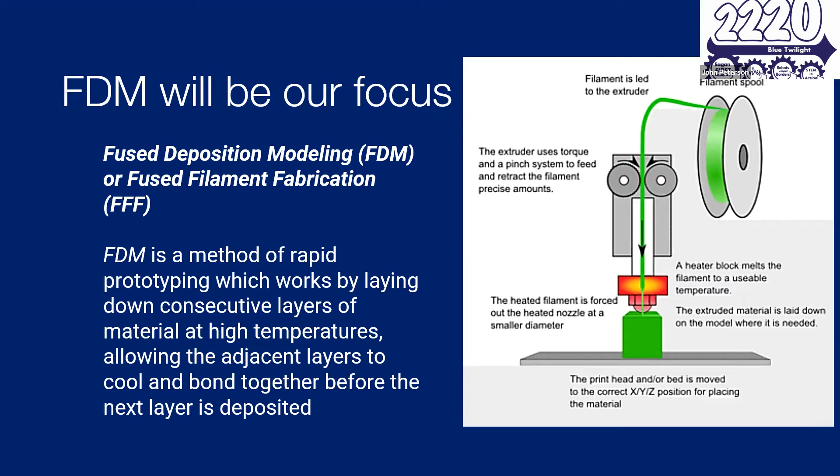But a lot of that comes from, I have a lot of experience and I know how to make and print these parts. And I'm hoping to impart that knowledge to you so you make a great robot with great 3D printed parts.

Let's take a review here with a close-up of FDM technology. If you look on the upper left, you can see an extrusion device. It's sort of like squeezing toothpaste out of a toothpaste tube, or a hot glue gun. In fact, that's how one of the guys who developed this process started working. He just layered up using a hot glue gun and made something that looked like this.

And one thing you'll notice about it is it's not solid. The way this works is all the material that gets deposited down has to remelt and adhere to the next layer, but there's still gaps in it. So one of the first things you'll learn is that there are limitations to FDM, and it means that sometimes the best choice is to either machine a metal part or buy an injection molded part. And as an example, we'll get into that later too.

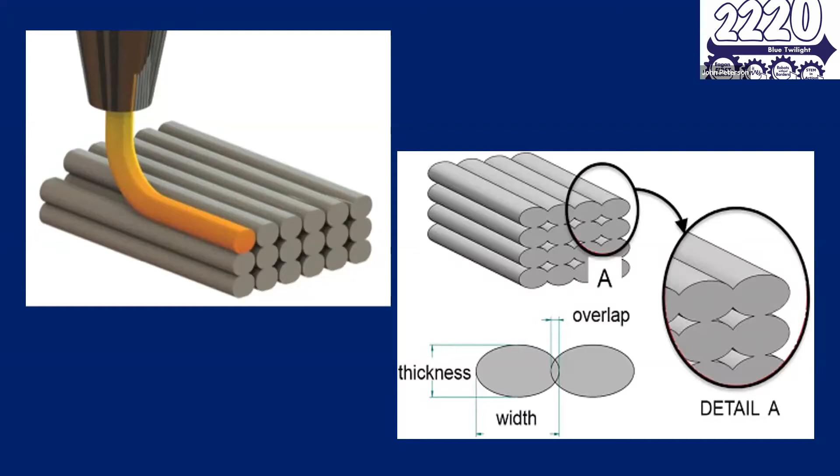But you can see how ideally when they join together, there's a little bit of overlap so that the machine with both this heat and pressure squeezes the layers together and holds them.

And that is something you can affect when you are slicing your part and laying it out on the build platform. And if any of you couldn't think of another material, a very common one is wood. If you think of a 2x4, if you try to break it in the long direction, it's very strong, but you can jam a crowbar in the middle and you could pry the fibers apart.

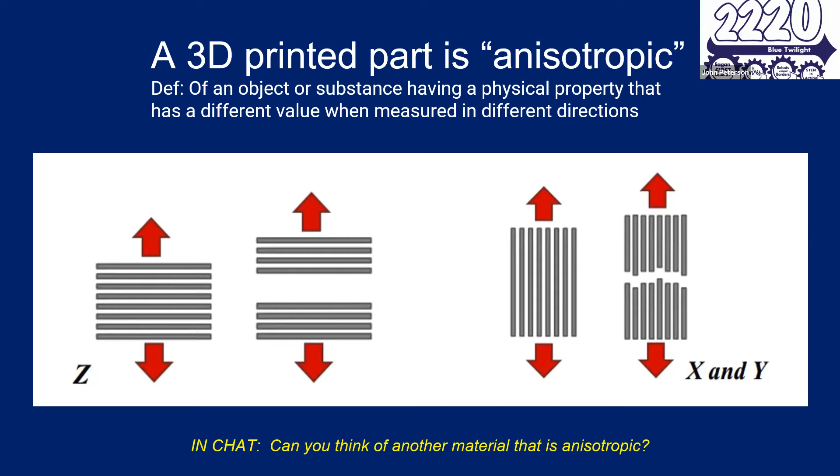So what you want to do is you always want to put a radius in there when you have a part like that, that has a force with a sharp inside corner. That smooths it out and makes it much stronger. And another thing that it does is whenever the machine has to come to a sharp corner, it has to slow down and actually stop. And what that does is it adds extra heat to that section of the 3D print and can cause it to warp later on.

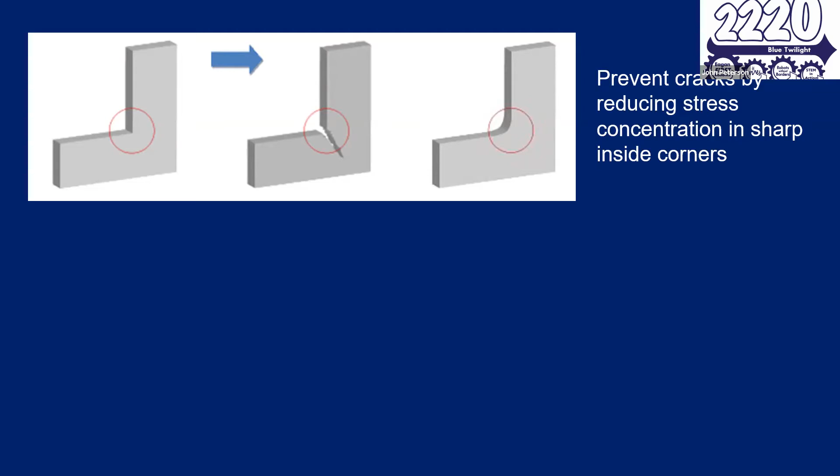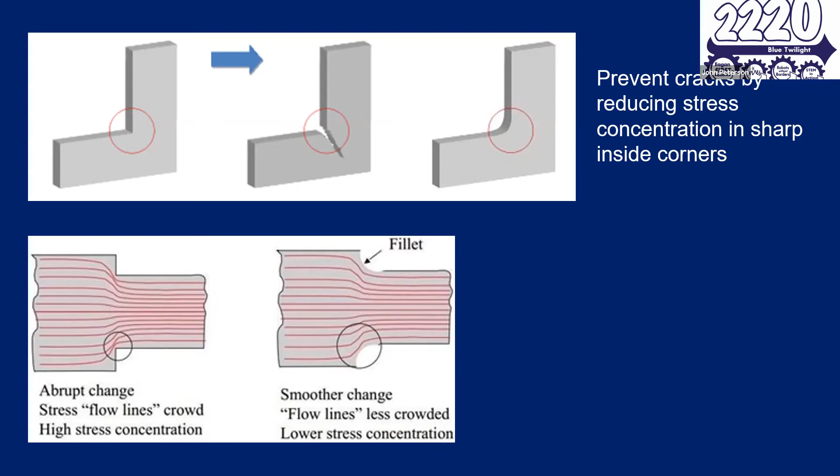And you can see the lines of force are, again, separated and have some space between them when the fillet is added to the part. And it's a very simple thing. You just use a radius command and you add it right in there.

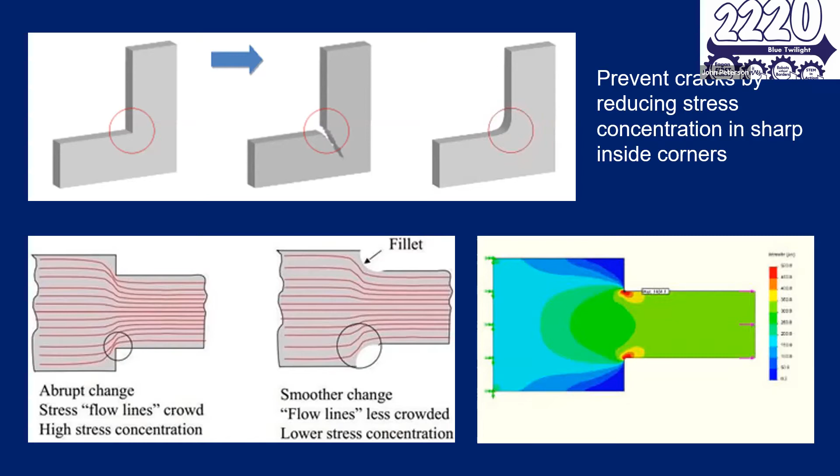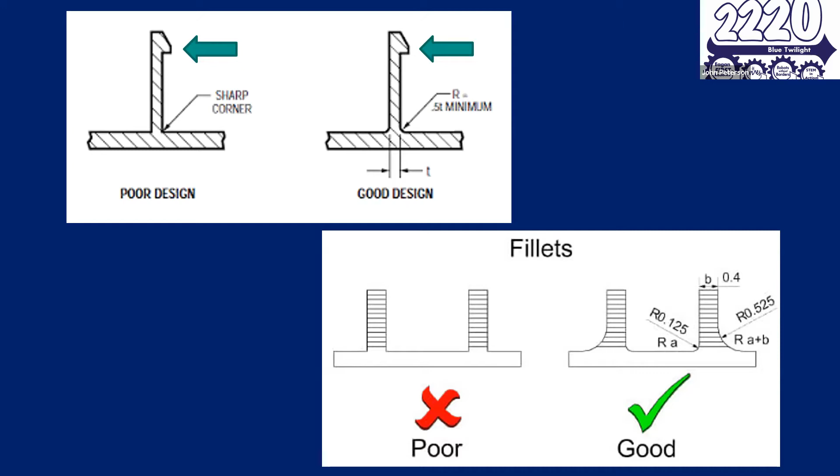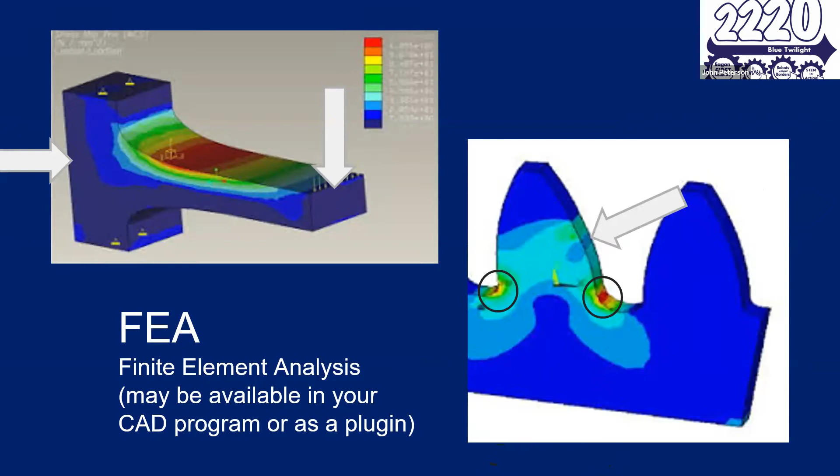Everybody's used to gears. Typically, the forces tend to be spread out, but in this particular part of the simulation, it's centered where the arrow is. And you can see where the high stress concentrations are. And so what you might do is, if you have the space, you've got to make sure that the mating teeth don't cut into that area, but you might put a little extra radius on there, and then it would be good to go. It's especially important for plastic parts.

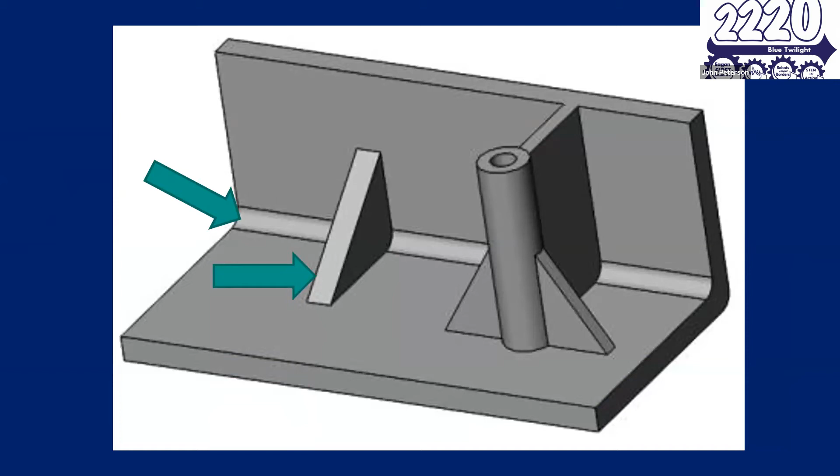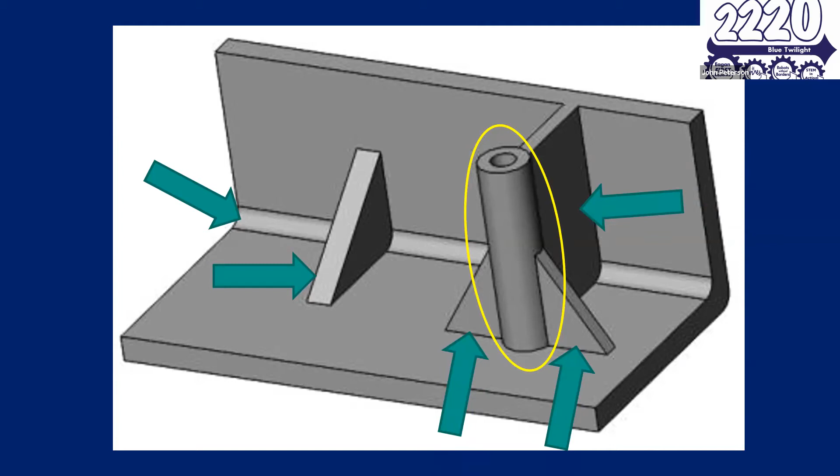And you've decided you want to add a boss in here, and it's hollow, so you can thread it, put screws in there wherever you want. But just standing there, it's not going to be very strong. So you can add brackets to each side, and you can also stabilize it with the other wall with this bracket right there. All things that are quick and easy to do in CAD, but they make a huge difference when you've printed your part and put it into whatever application you're using it for. Of course, it also helps to know when you're designing your part where the forces are going to be on this part, so you can reinforce them accordingly.

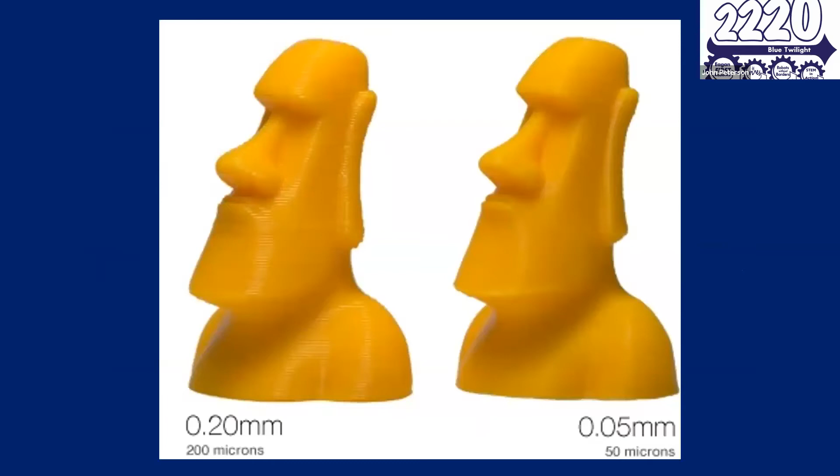All right, now let's look at some appearance related issues for nozzle and layer height size. You've probably seen a lot of these things with different machines. You can see on the left, they used a much bigger nozzle on the machine than they did on the right. The lines that they built it with are very visible. The ones on the left are probably more appropriate if you're making a functional part. The ones on the right are more appropriate if you are making an appearance related part, like this is.

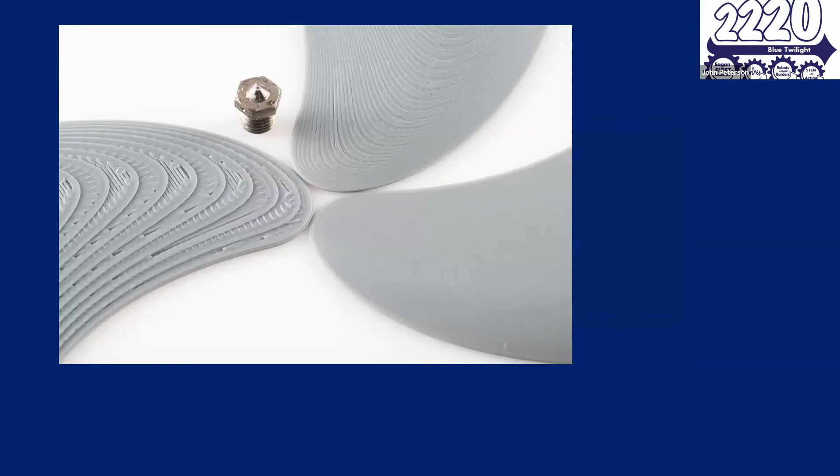Also, when you're printing things that are thin and the angle on them is very long, you can run into situations like this. You can see on the very left, it's very coarse, the stepping there and everything like that. And then it gets finer and finer as it goes around clockwise. What you're looking at here is the one on the left has some much thicker layers. And as you can see, they bulge out along the angle and are very visible. On the right, you can see that because the layers are finer, there's not much that you can see.

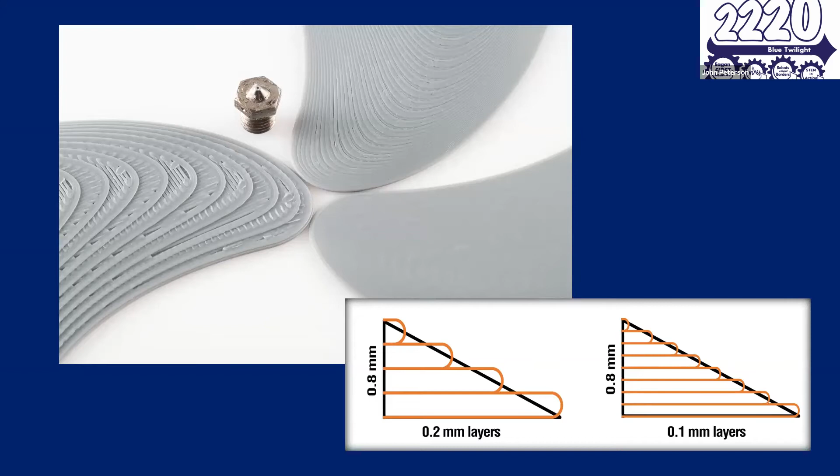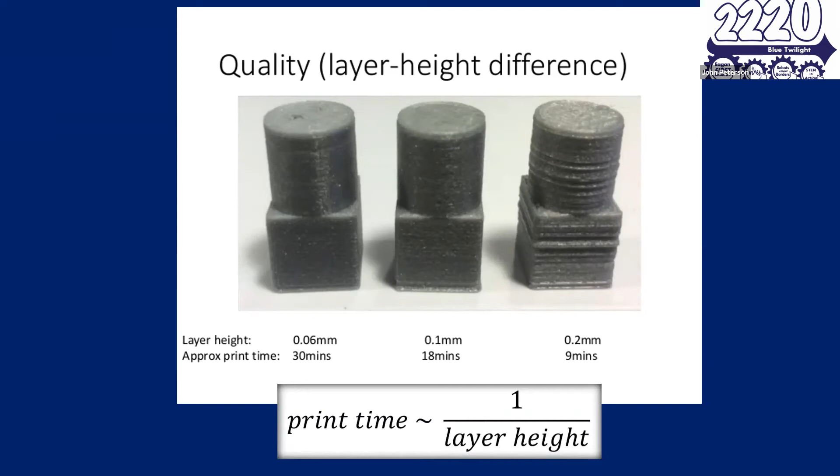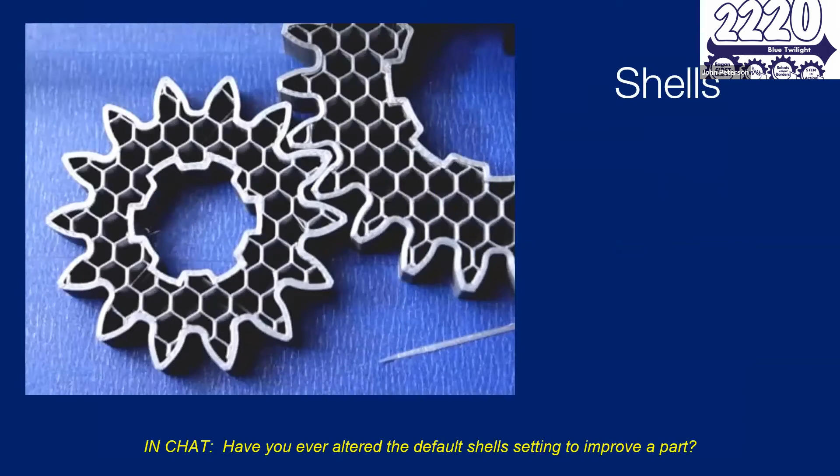There are other choices besides nozzle size and layer height that affect time, failure resistance, and strength. Here is a big one. This is a classic example of what you want to change your shells for. Sometimes it's called shells, sometimes it's called profiles.

There's any number of things that your software or your machine will refer to it as, but it's the same thing. In this case, see the outer layers there? And in machines that you tend to have in FIRST Robotics, if you set the shells or profiles to 6 passes or something like that, it's going to make them all the same way. But in this particular case, it makes a lot of sense.

There's a spline drive on the inside of that gear, so that needs to be strong. And of course, the outer part, the teeth themselves, they'll be moving together, and by being thicker, they're stronger and they'll wear a lot less.

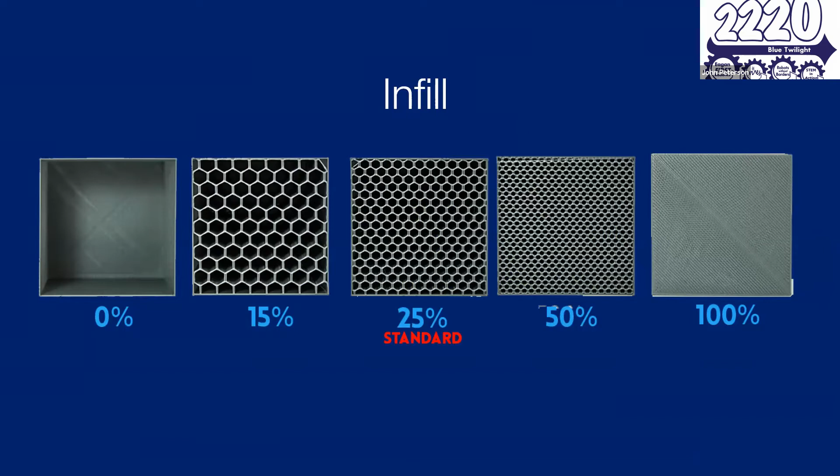Now, you know that in a part like this, the geometry of it, adding radii and things like that, is important. But to make it very strong, you also want to print it correctly, and you want to use your shells for your strength instead of your infill, because the shells, when you do that, all the fibers are either in tension or compression, and it's using the greatest strength that they have.

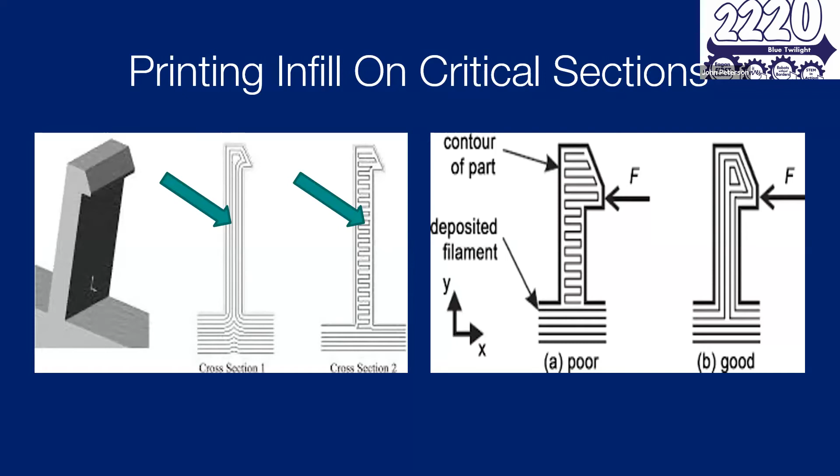And you really have to look at this. You can step through in your slicer to see all the layers, and you can find anomalies in there because the machine, it's pretty smart, but not as smart as you think it is. Here's an example of, this is a professional level machine, and it has the ability to vary a lot of things, but even it came across some problems when slicing the CAD model.

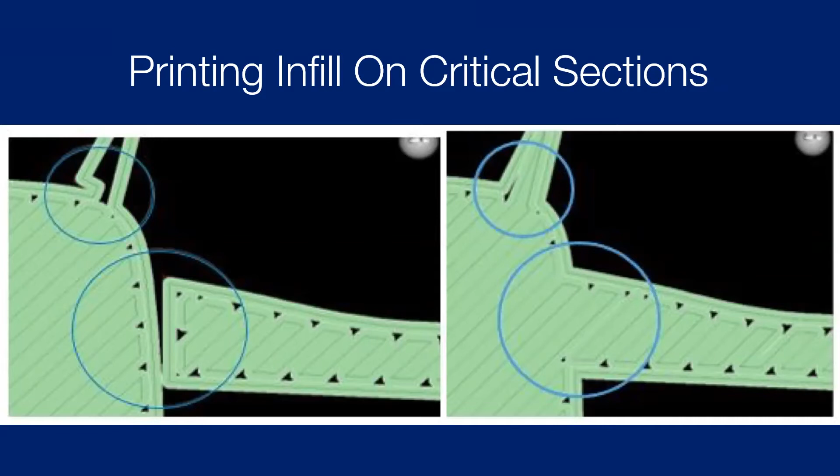This is where, through experience and experimentation, you learn to use the advanced features of your slicer. And if that doesn't work, you may have to go back to even your CAD model and see if you can figure out what's going on. It's very important, as shown in the right.

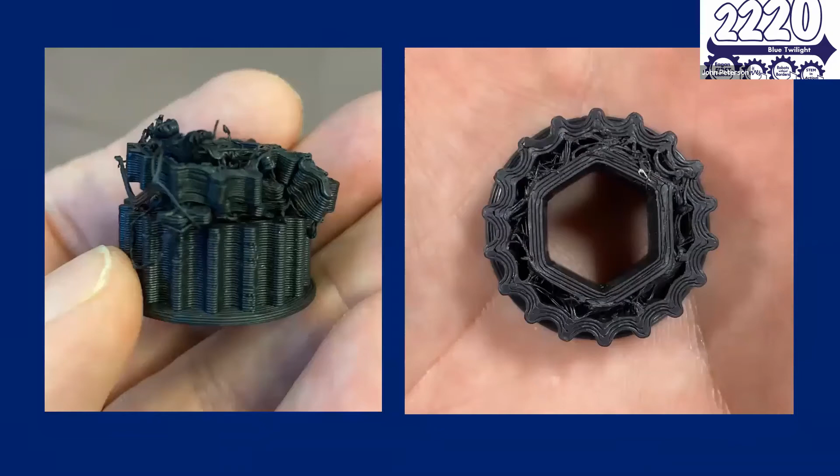In this particular case, we had some experience with this. This is the remains of a hub used to drive a rubber belt. It was wider than this. The bottom part pretty much remained intact on the left-hand figure, whereas the top part just stripped right out. There were two narrow belts on here, and they were driving off the same hub. One of them probably jammed and stripped it out.

Now, if you look at this part on the right, you can see how there just isn't much infill in there. It's got nice shelling on the teeth, nice shelling on the drive shaft, but because the infill wasn't very good, somebody probably accidentally went with just the standard 25 to 35%, and it just wasn't strong enough. It just stripped right out. I mean, it worked for a while, but then when it encountered some loads, it broke.

And that's the last thing you want when you're going into a final match or something like that, is to have a piece just totally be destroyed. So keep that in mind: you need to follow the force, in this case, from the shaft out to the teeth. And if you come across an area where there isn't much material there, you'll know you need to make some corrections. In this case, strictly in slicing. You can see the infill there. There's hardly anything there.

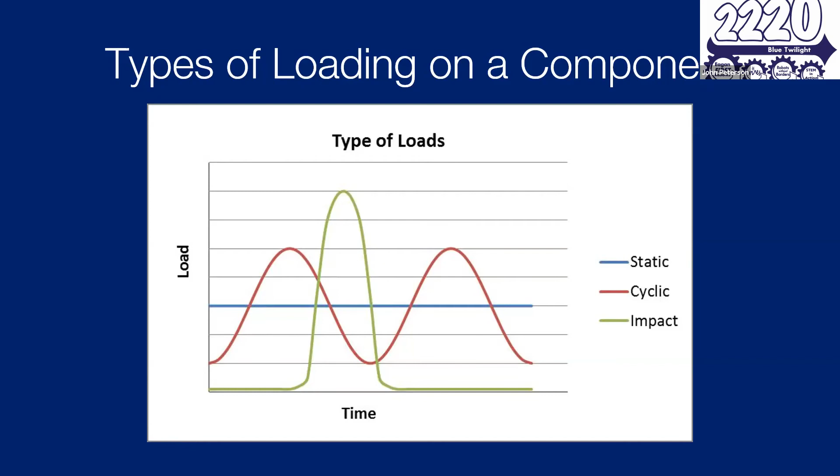It's not a static load, but a dynamic load. They call it an impact load. That's when the robot hits the wall. And you can see it's much bigger than the static load. It's usually a short-term force. You hit the wall and you rebound, but all of a sudden you've calculated a part to hold 50 pounds, and for a brief period of time, it encounters 100, 200, 400. It depends on the speed and how much mass is behind it.

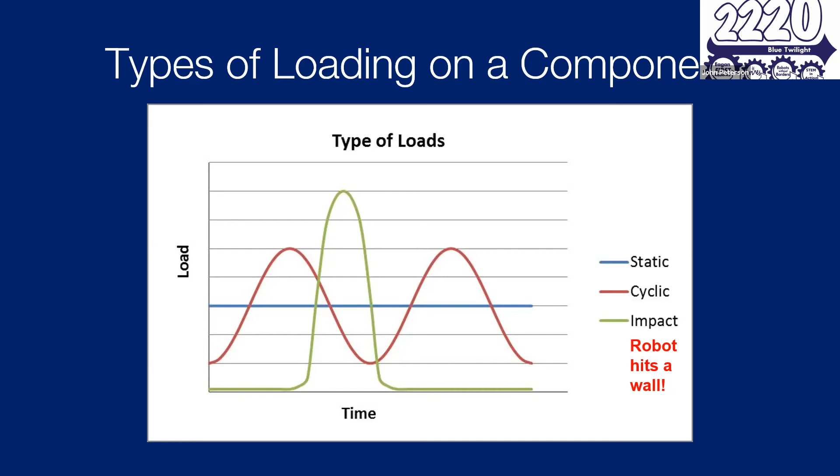So when you're calculating a load, you need to give it a safety factor, just like they do for bridges. Maybe a bridge will be 2.5. You should make it much stronger than you've calculated, not just for impact loads, but because sometimes the way the printer makes it isn't ideal. So it's weaker than you think it is. In case you're wondering, the oscillating red line, a cyclic one, that's like vibration. That's what that's for.

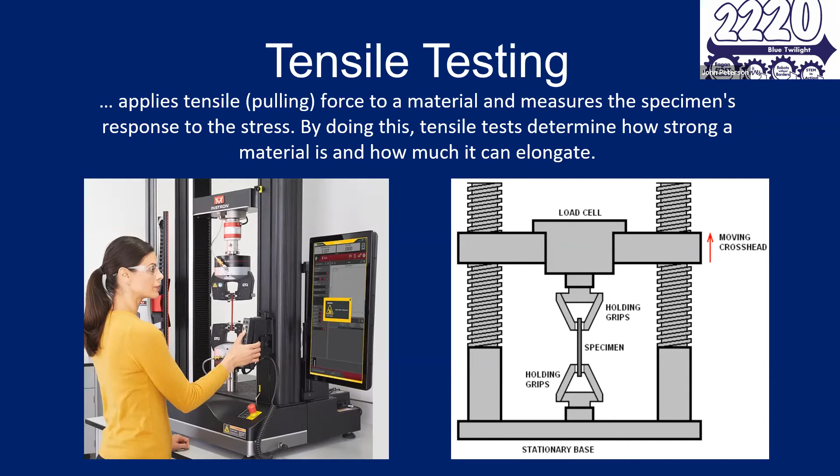So how do we measure these forces? Well, this is what we do at 3M. We have a lot of these machines. They're tensile testers. This one's called an Instron. You can see it on the left. And on the right, it's reduced to its basic component parts. You have things that grip the piece you're testing. The crosshead will move, and as it moves, that's measured by the computer. The computer also determines what load is being placed on the specimen. So let's see an example of an actual one in action here.

There's no sound to this, in case you're wondering. I don't think it's showing on the screen share. It isn't? Don't you see it? Not yet. You might want to switch to a full desktop capture. Tested this. All right.

So what happens here, they take known size samples. I call them dog bones in a lot of cases. They tend to have rounded edges too, and they stretch them, and with known forces, they see how much they elongate, and then they see when they break. You can see the output of this machine as shown here.

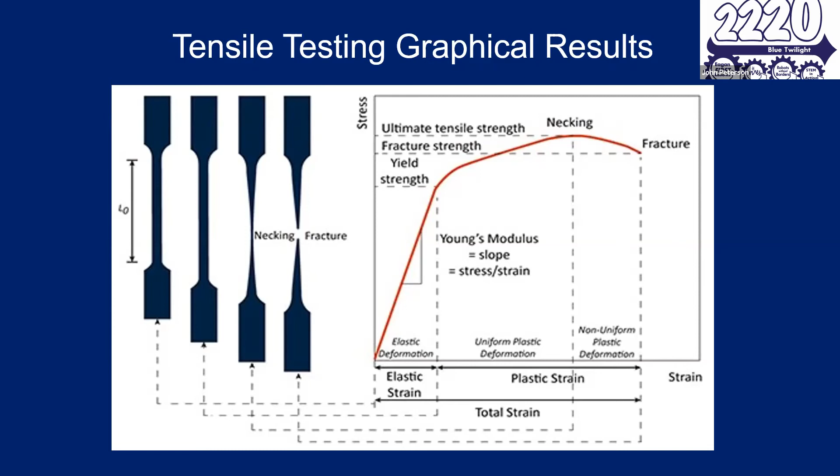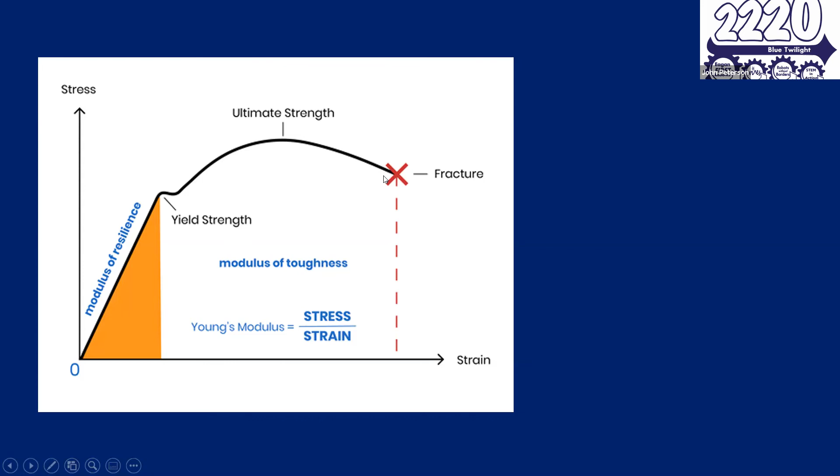Here's an example of what you might see on the machine. This is mostly used for materials like steel that are pretty strong. We'll get into what some different materials look like later. But it goes within its elastic range for a while, and then it starts to stretch. You see it goes up to its ultimate tensile strength. But at this point, it's beginning to be destroyed, and then finally, you can see the curve goes down because the force required to deform it is less, and then it breaks.

So these charts, if you're going into mechanical engineering, you're going to go heavy into this, because this is really what defines all the materials you're going to be working with. And you need to know this so that you can place your material within the elastic range and you don't push it any further.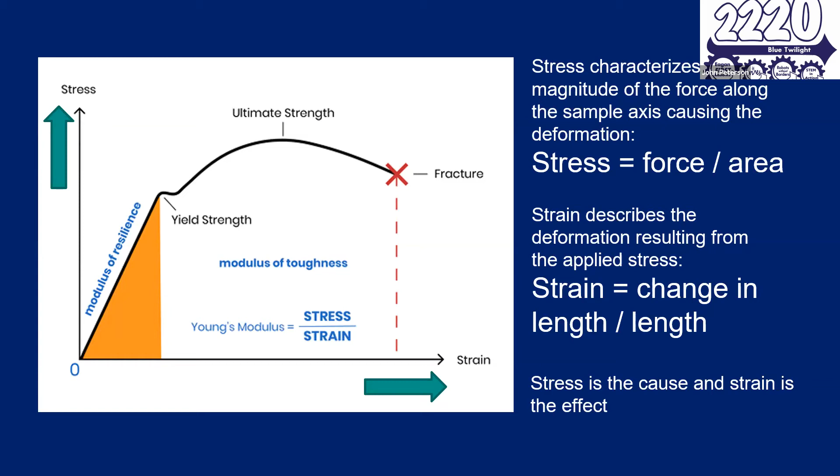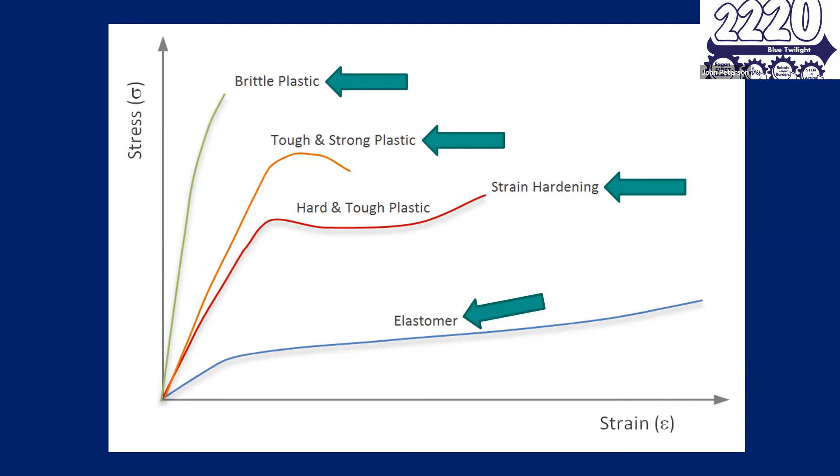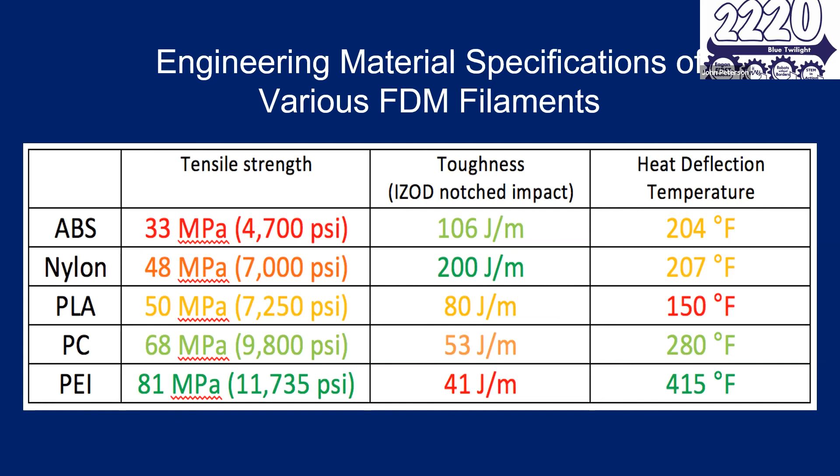But one more thing you need to take into account is the temperature. If your parts are just hanging out in the air, you probably don't have to worry about this. But if you decide, oh, I've got a CIM motor, I'm going to put it in a mount that wraps all the way around it, those motors get hot. You may find, for instance, that the PLA maybe doesn't melt, but it'll deflect and the motor will pop out. So these are pretty much the three material specifications you need to be thinking about.

I've worked with some of the people at Underwriters Lab, big FIRST sponsor, and they've been doing some experiments because there's fumes that come out from all of this. While this is a common industrial filament, ABS, it was their recommendation that students do not use this in their home or school environment because of the inhalation hazard of the fumes. There's plenty of other materials you can use, so please, given a choice, don't use ABS.

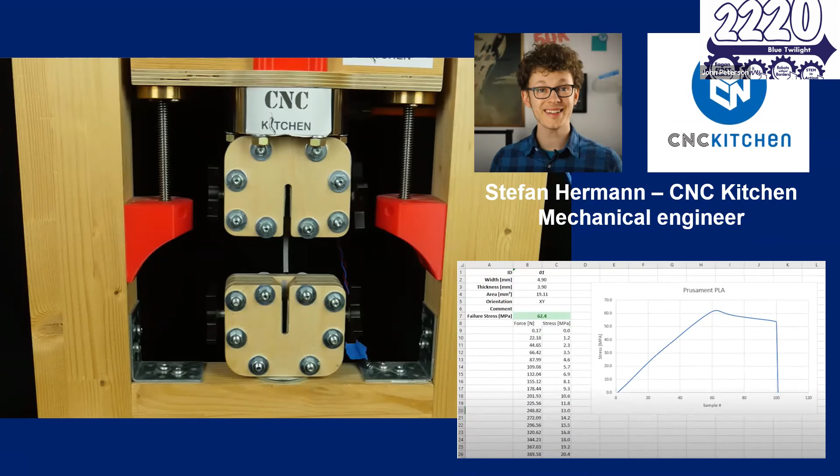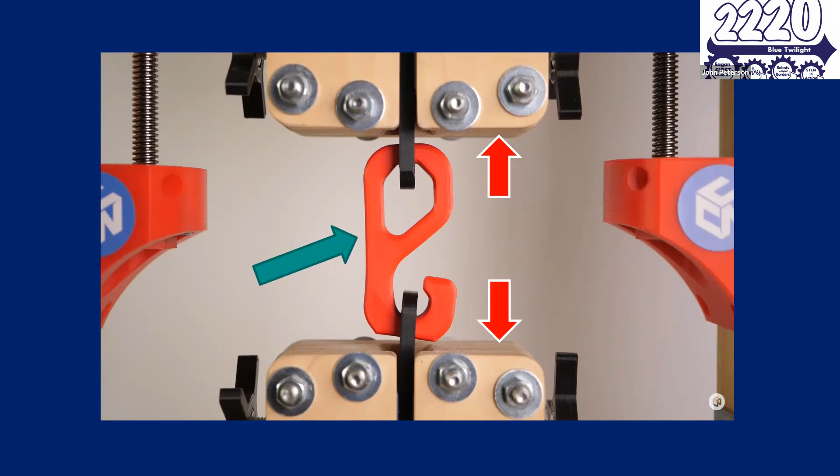So here's how he's hooked up his machine. You can see there's the sample right there. It's got it in the middle, and it has an interesting shape to it. And then those are the grippers, and the machine applies a force in these two directions. It's basically pulling it apart. You can see it's in mid-cycle right there, and the bottom part is already deflecting a little bit. It's an interesting force he wants to apply here. It's along the axis, and it's a torsional force too.

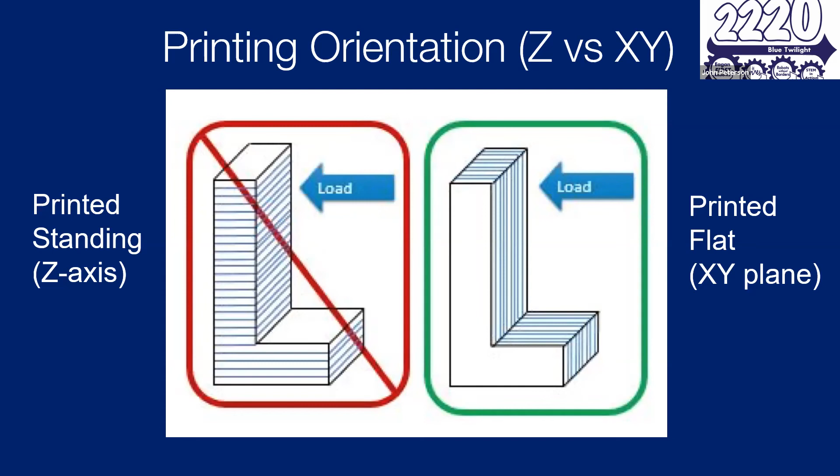You remember back, we talked about how if the fibers are stacked, they're not nearly as strong as if you have a load that's along the axis of the fibers. So he tested that. He wanted to know how important was that. You can see on the left how the samples were printed. If you pull along that direction, you're pulling the layers apart. He calls that a Z-axis sample. On the right, you can see he printed it flat. You look at the drawing, you can see that part is aligned along the axis of the fibers, so it's using their full tensile strength to make this a strong part. So let's see what he did.

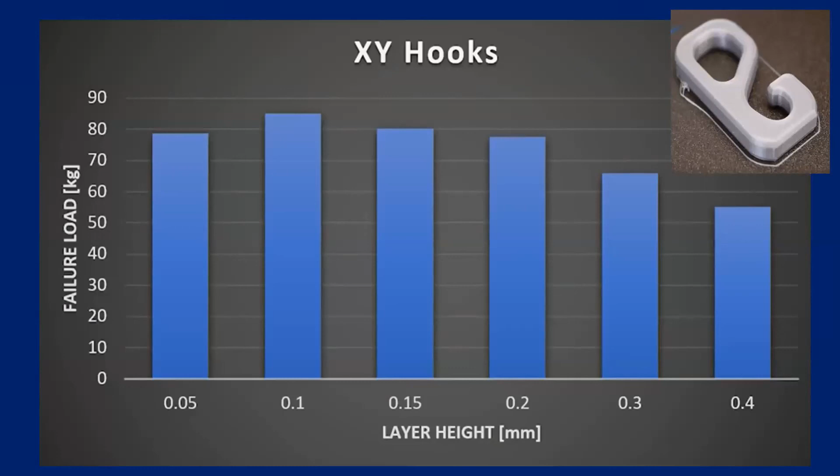He did a first test here. Those are the XY hooks you can see in the upper corner. That's how they were laid out. And he tested out layer height here, layer height and the load on them. And you can see it doesn't vary a whole lot based on this.

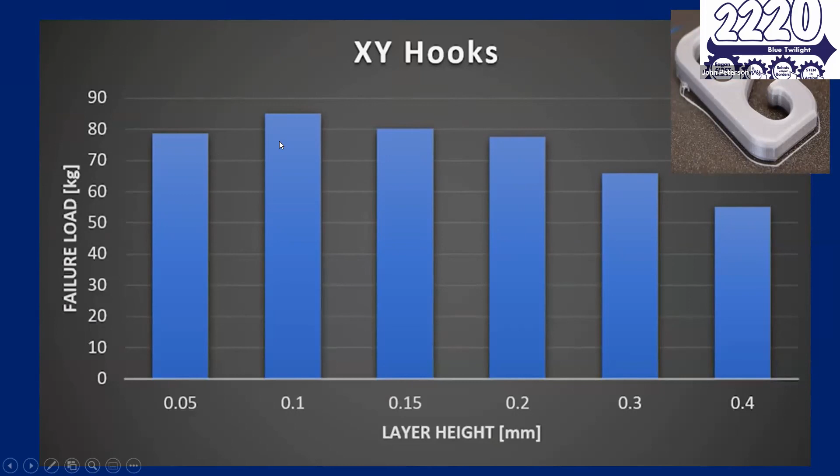But if you look here, you can see when he pulled those apart, it just tore the fibers. And you should look at broken parts sometimes. You should do some failure analysis because it's very interesting. As I said before, the parts are torn along their axis and it uses the full tensile strength of the fibers. If you look down here, you can see how they're almost circular pieces. They're broken apart.

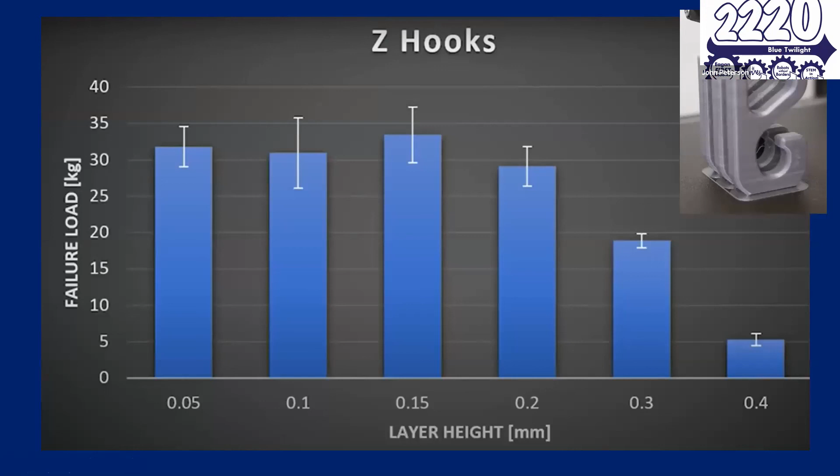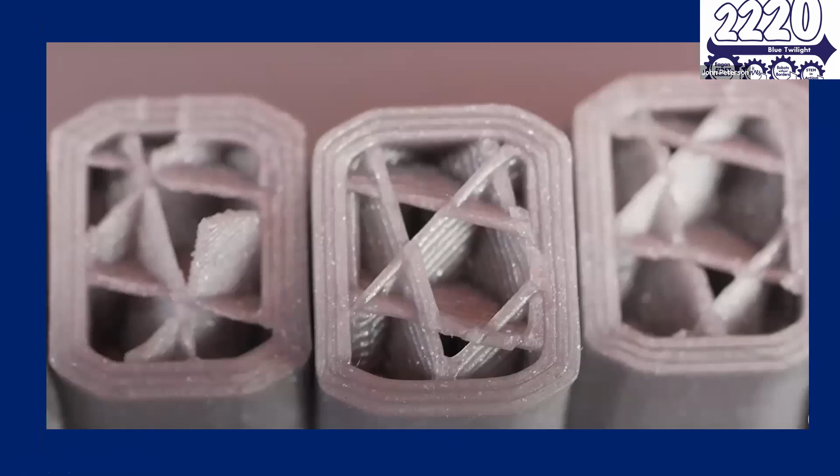So anyway, you can see here the load he's put on doesn't vary a whole lot by layer height, but let's go into testing these along the Z-axis where you're pulling the layers apart. You see how they broke cleanly. If they broke that clean, they probably didn't take much force to do it. And here's what he found.

In testing this, you can see how the forces in the Z-axis where you're pulling the layer apart are much weaker than in the XY axis where you're breaking them along the fibers. So right there, that shows you it's almost 3 times as strong in that dimension. So if you remember one thing, remember that.

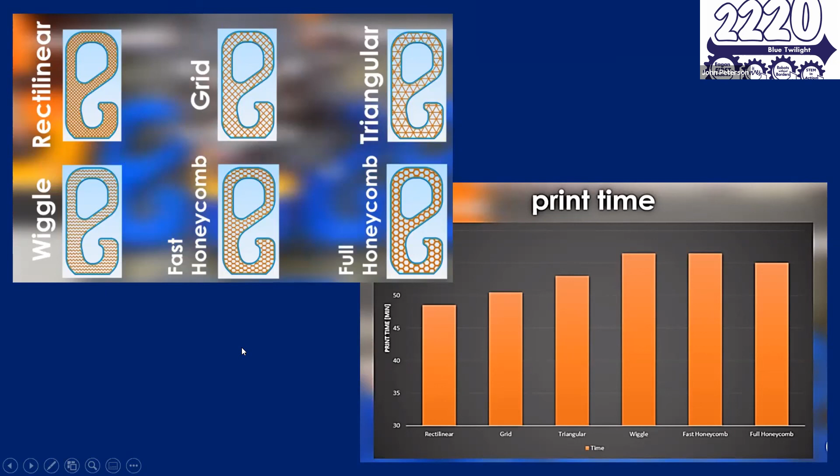Infill geometry. There's a lot of different types you can use here. All we're going to talk about right now is how much time these take. I would suggest using the rectilinear or the grid type here. It's very quick for the machine to do. If you ever watch it do some of these ones like the wiggle ones or the honeycombs, it takes it a lot longer. But then you may wonder, what about the strength?

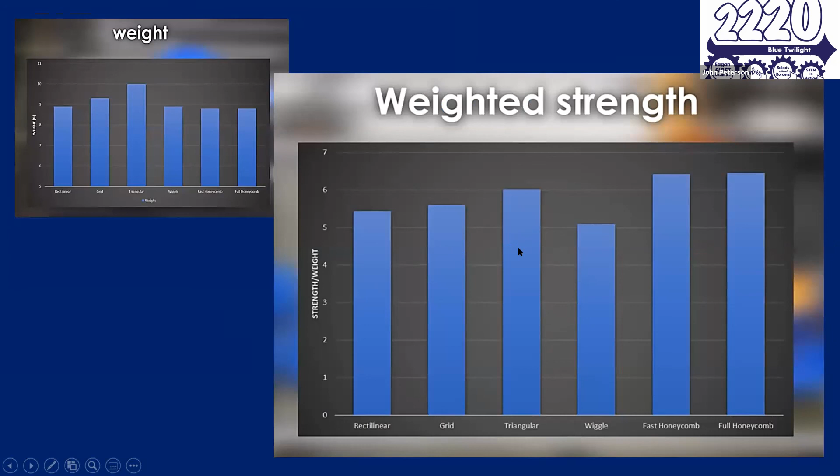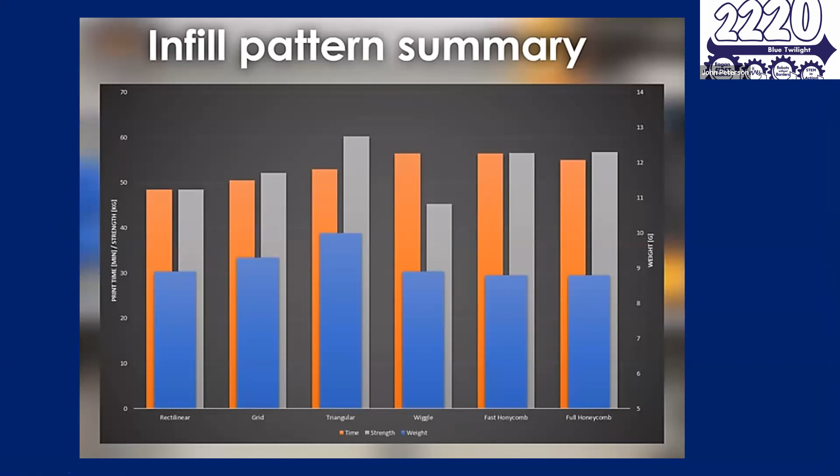Well, it looks like the triangle ones have a little bit more strength, but is it worth it to you? It's not that significant. And while some of these might be a little bit stronger, they take a lot more time to print. This particular chart kind of combines everything together. So you can see the strongest parts tend to have triangular infill. And of course, you want to print those along the XY axis to get the strongest parts.

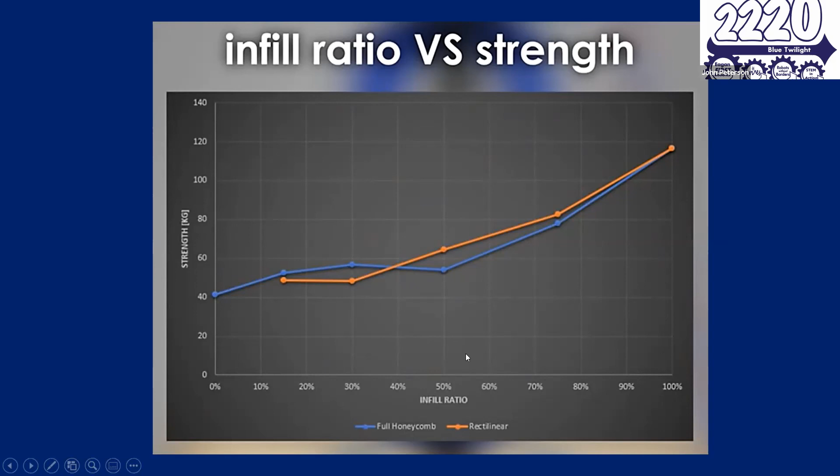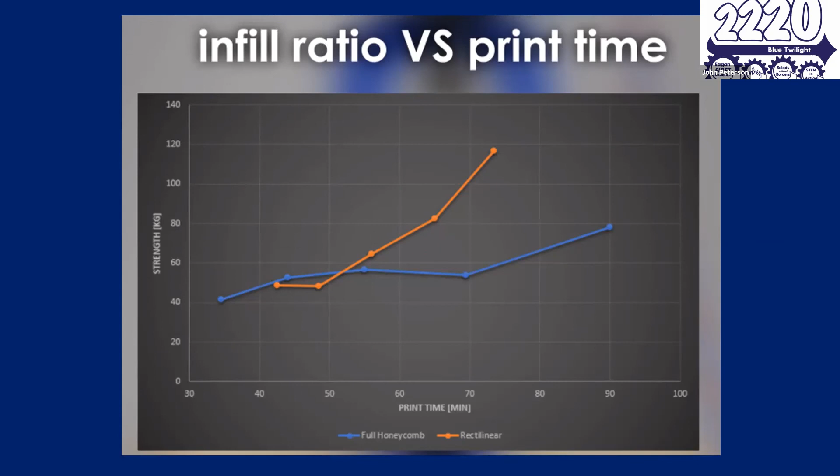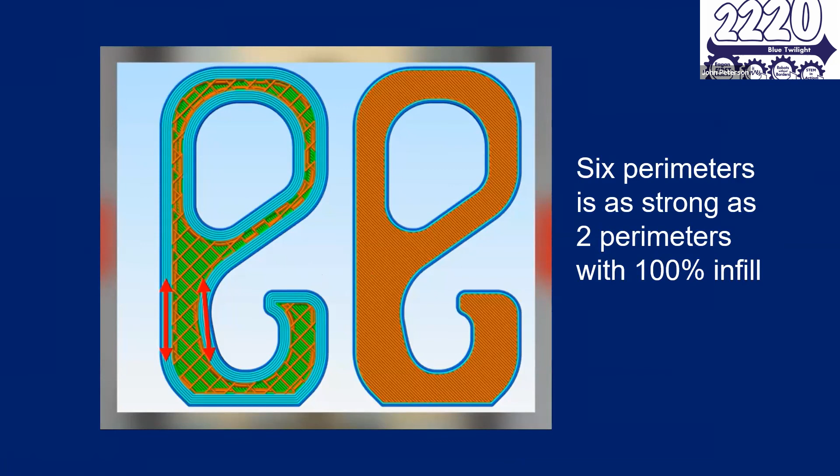Shell thickness. One of the studies he did found that making 6 perimeters is as strong as 2 perimeters with 100% infill. He hardly has any infill in there. So clearly, increasing perimeters is the way to go to make a stronger part. And you can also make it lighter and produce it faster. This one just shows the weight, and the perimeter again is shown to be more important to make a strong part.

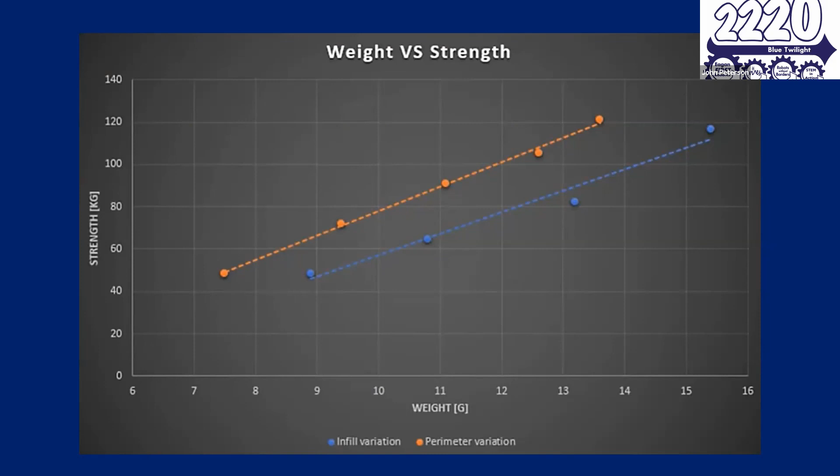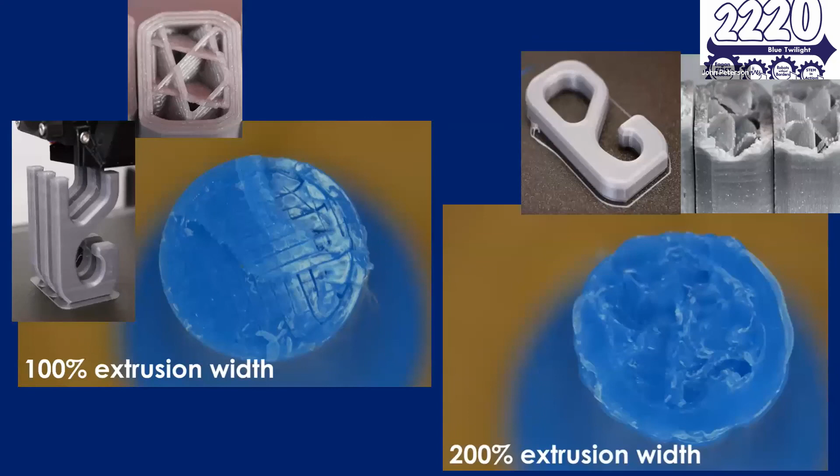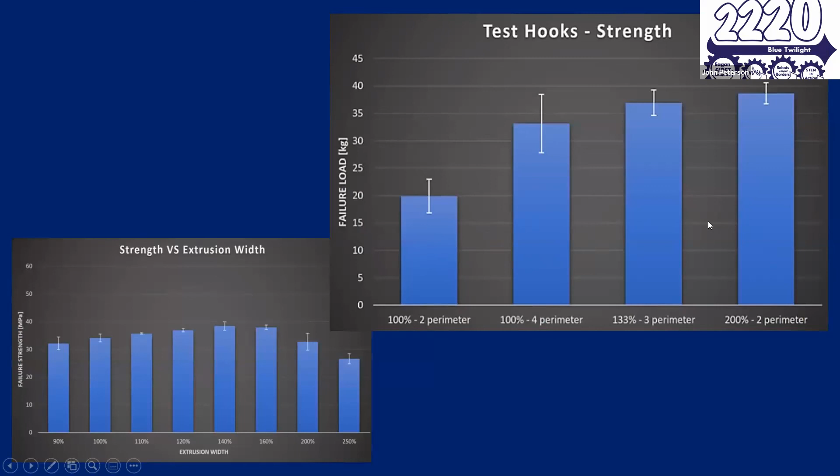Extrusion width, we're gonna have to wrap this up quickly. That's something else you can vary on your machine. You can see how it breaks cleanly on your standard ones and rough when you increase the extrusion width; rough was usually associated with being stronger. And as you can see, 2 perimeters, 100% infill, or 100% extrusion width, and this one is 200%, and it's got 2 perimeters on there. Again, those are advanced machine settings that you should look into.

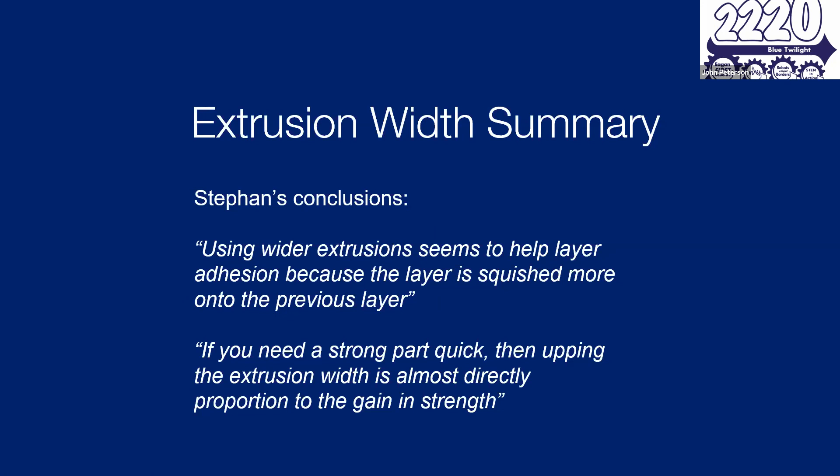And his conclusion was using wider extrusions seems to help layer adhesion because the layer is squished more into the previous layer. And you have to make sure you have the correct heat there too. So if you want a strong part, up the extrusion width, and that's almost directly in proportion to a gain in strength.

So what important things have you taken away from the presentation today? If there's maybe just one thing, what do you think it might be? You can put that in the chat. Just got a few minutes here. Again, I'm going to go into the one that I think is the most important. This relates to how you lay out your part in relation to the forces. If it's got a lot of force on it and you're pulling it apart in the Z-axis, it's not nearly going to be as strong as if the forces are ripping the fibers along their axis. There's other things, but if you remember one thing, remember that.

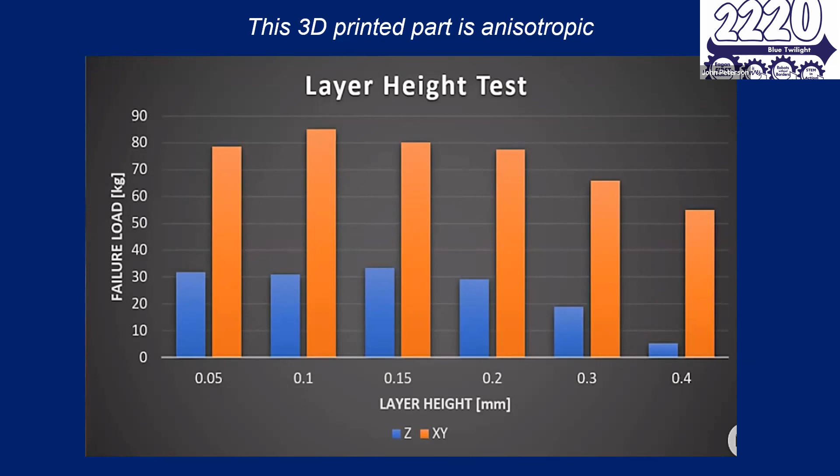So are there any questions that anybody has? You can unmute yourself and say them too. You don't have to put them in the chat. All right, well, if there's no questions, we're close to our end time.